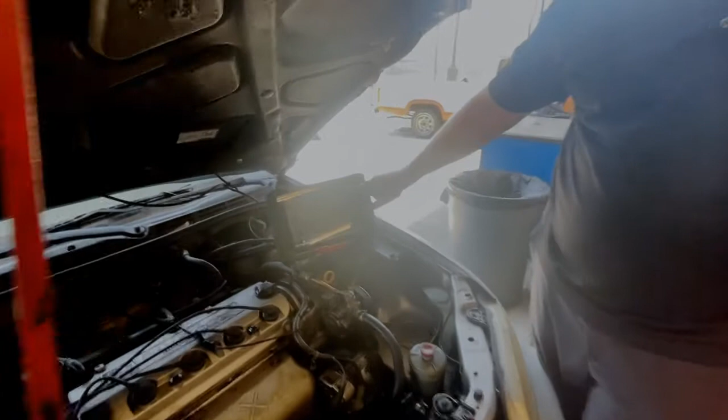What we're going to do is we're going to take away spark from each cylinder at a time, and we're going to look at the RPM drop on our graph here. So this is RPM, and we have in hundreds right here, and this is that live reading over here. So we're about 750, 740, bouncing right in between.

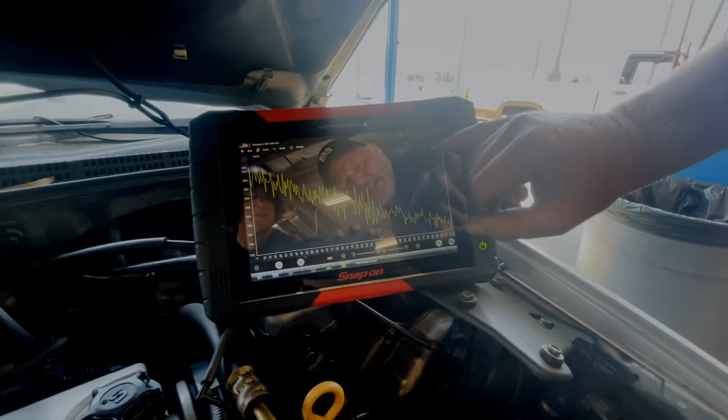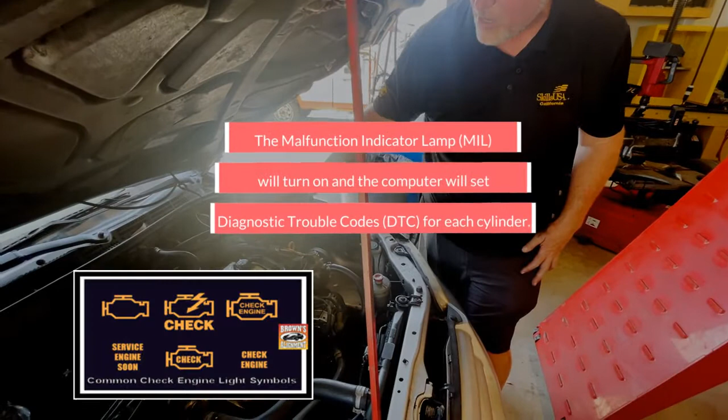So a cylinder balance test, you're checking the health of the cylinder by removing the spark. You could also do fuel injectors instead of the spark, but they're really hard to get at on this one. So we're going to just focus on the spark plug one at a time. This is cylinder 1, 2, 3, 4. Keep in mind this will set a code for each cylinder.

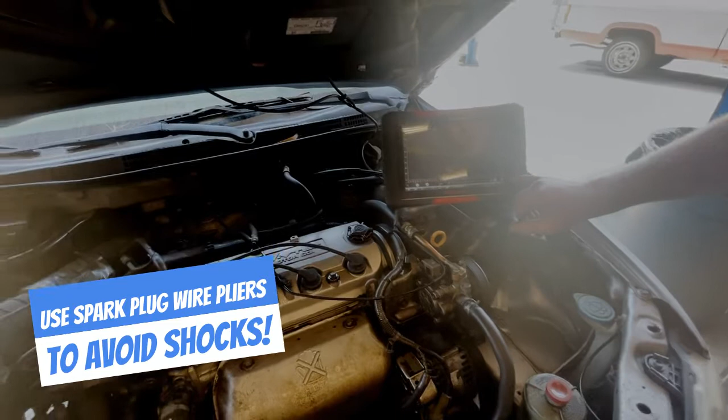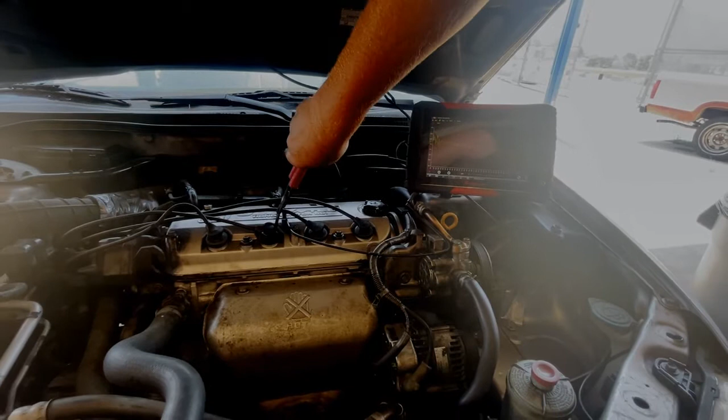So I'm going to go ahead and pull this, and I'm going to pay attention to our RPM drop. And put it back in. And it looks like it dropped to about 540. So now I'm going to go to the next one. Not quite as much drop. Go to the next one. That one seems a little healthier. That one's just as healthy.

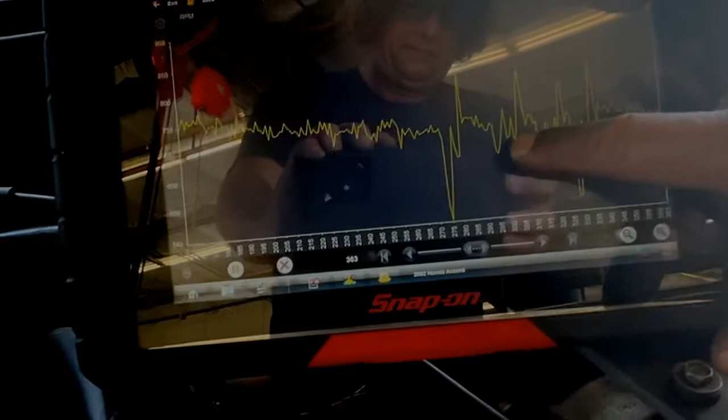So here's cylinder 1, cylinder 2, cylinder 3, cylinder 4. Cylinder 1 is my healthiest cylinder, which means I'm getting good air, fuel, spark, good compression. The number 2 cylinder is the one that I'd be thinking of as being my problem right here. So 2 is definitely the weakest. So let's go ahead now and rev the car, because when you do this test, you really should rev the car in between each RPM drop.

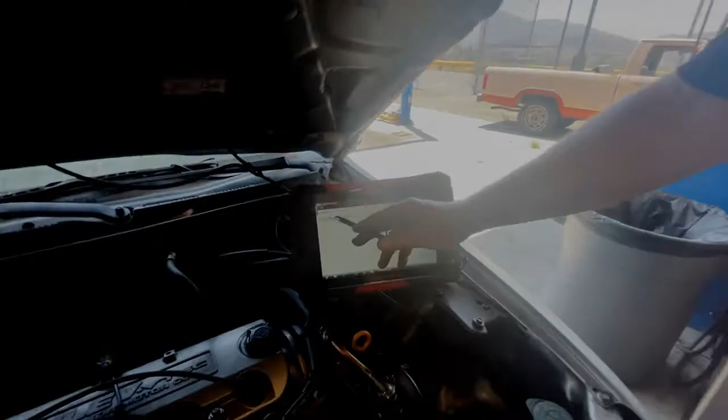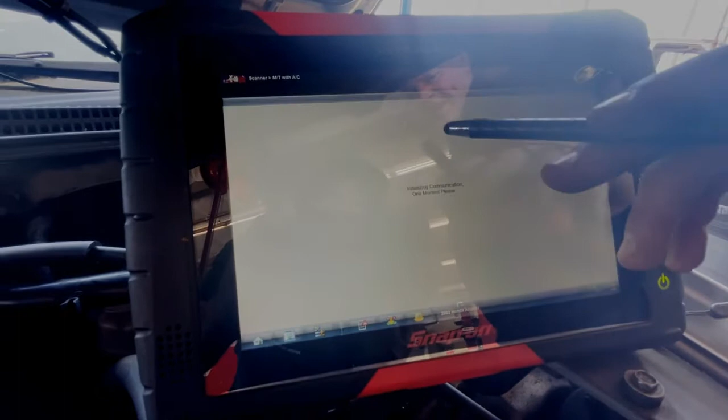But I want to show you how I got the RPMs. I'll hook up my scanner to the data link connector. And this is on the engines menu, okay? So there is a menu for engines and other computers. We want the engine, we want data. And then the very first data most cars will give you is RPM. And so here's RPM, it's always the number 1.

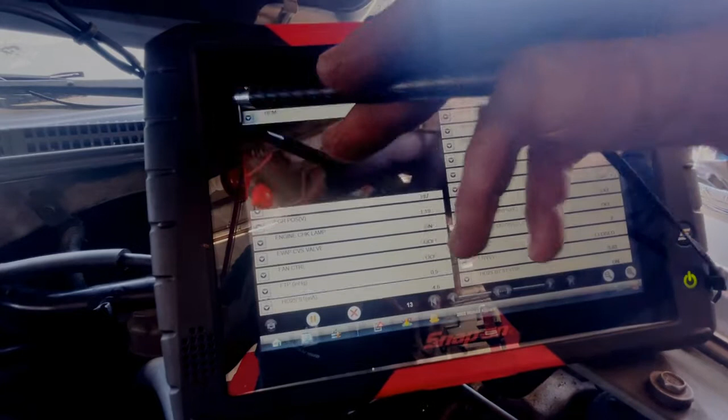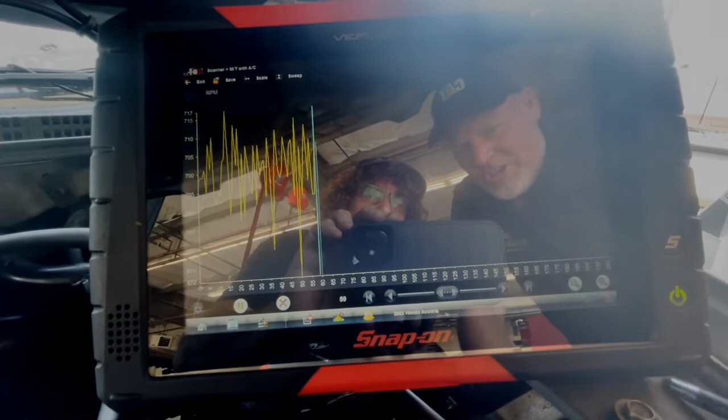And then I want to expand this. See the little arrow right here? There we go. Okay, so that's how we expand it. Hit that little arrow, and if I want to shrink it, go right here. So now let's go do our test real quick. We're going to do it real fast. We're idling right now about 700 RPM because our car is warmed up now.

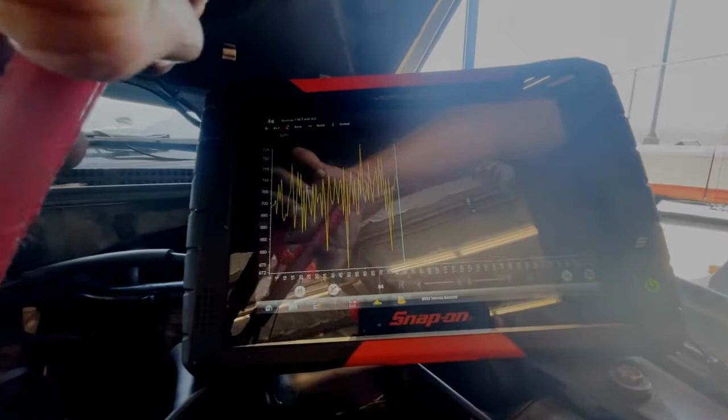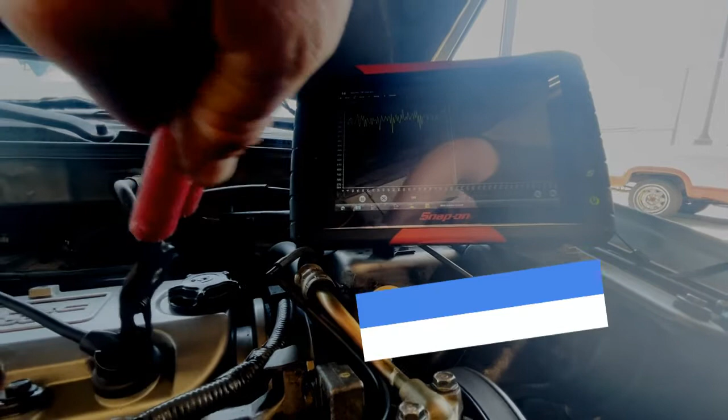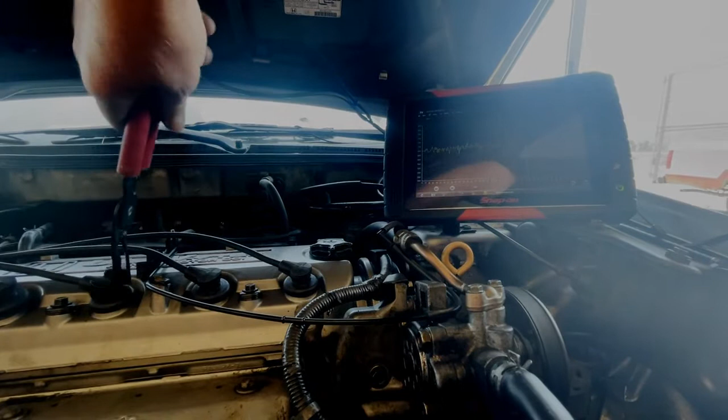So I'm going to go to cylinder number 1 right here. I'm going to back out a little bit so you can see both. And I'm going to do all 4 real fast. Here we go. There's 1 drop. Go to cylinder 2. There's number 2 drop. Go to number 3. There's number 3 drop. And then I'm going to go to 4. And number 4 drop. Okay? And now, before I lose my info, I'm going to go ahead and pause.

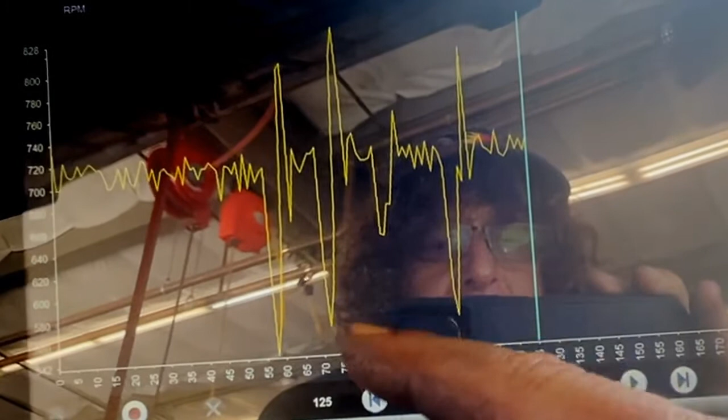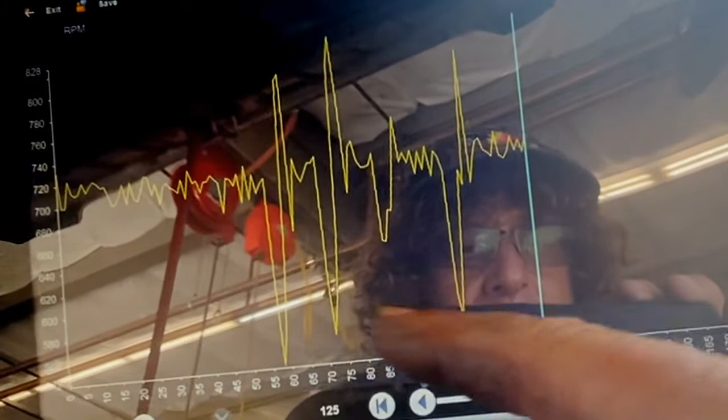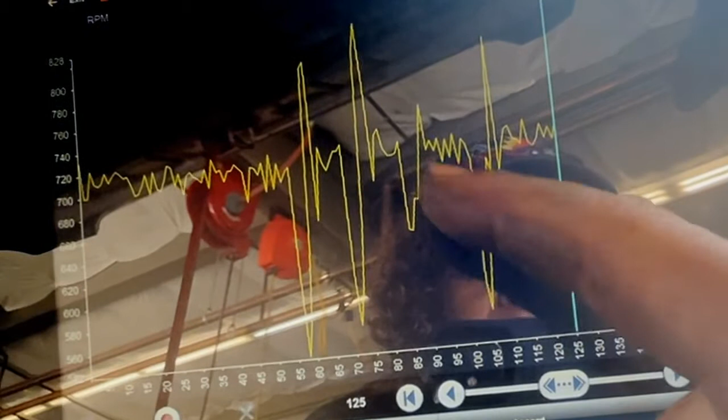And now let's go ahead and study this. Let's look at our readings here. So this is cylinder 1, 2, 3, 4. And what you're looking for when you take away either fuel or spark is an amount of RPM drop, and they should all be within 5 or 10% of each other. So these 3 are within range. They're not too big of a difference between number 1, 2, and 4. What I'm worried about is cylinder number 3.

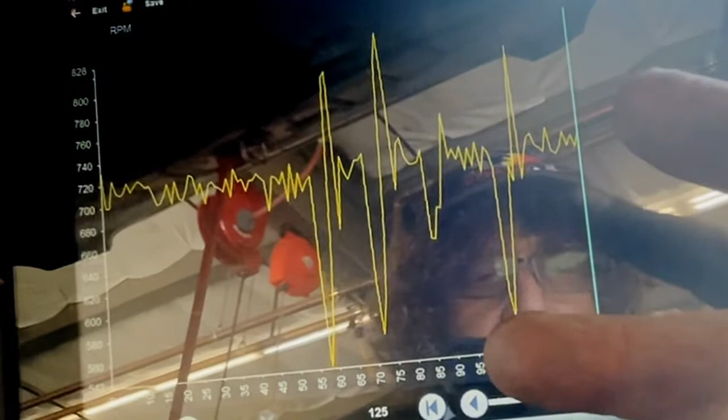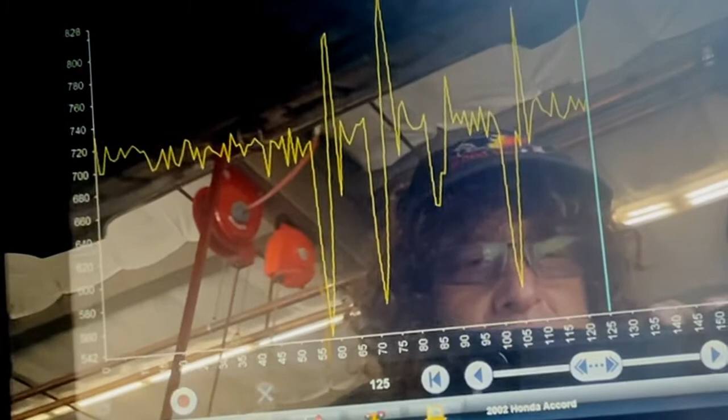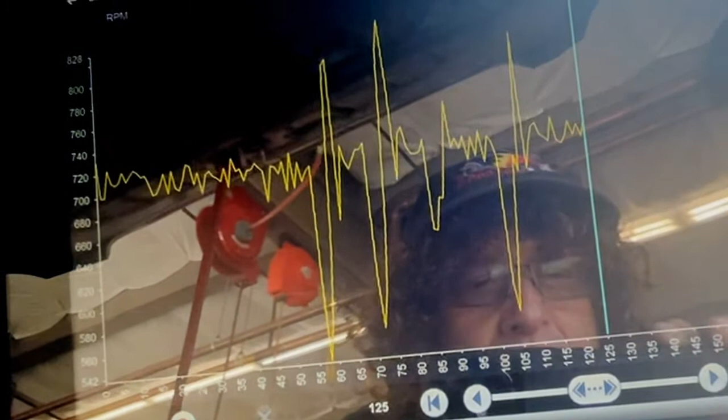So we got to figure out first, is it tune-up related, which is it air, fuel, or spark, okay? So it could be just a tune-up where I need to change my spark plugs, or it could be a bad injector. Maybe I have an intake valve that's not functioning properly, okay? If it's not tune-up related, where you can't adjust the valves, you can't change the injector, or you can't change the spark plug, then we mechanically test this whole motor, doing a compression test, identifying number 3 and if it's a compression issue.

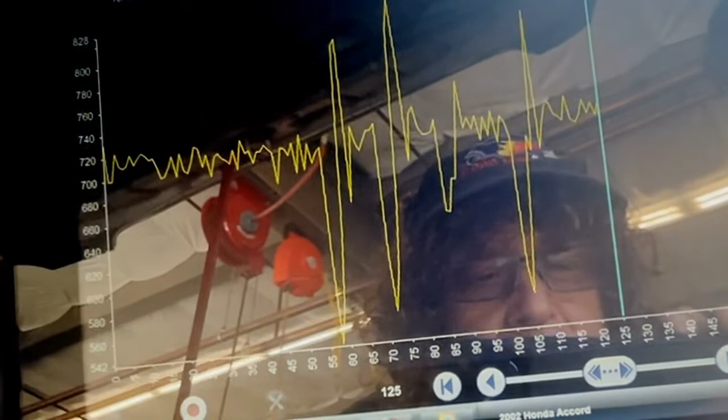So we don't really know what the issue is here. It could be tune-up, it could be compression. So first off, what we would do is go pull the plug and let's inspect it and see what the color looks like. All right.

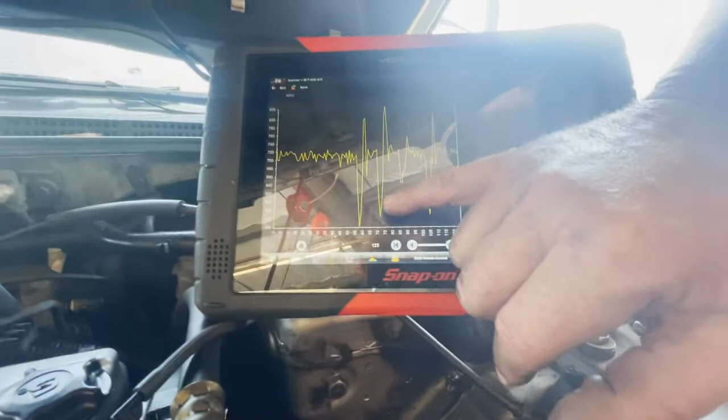Another thing I wanted to point out is number 2 cylinder right here. Here's my drop. If it was the same as number 3, I would be suspecting a blown head gasket between cylinder 2 and 3. So the gasket that seals each of these cylinders, we would have a blown gasket between cylinders 2 and 3 if these match.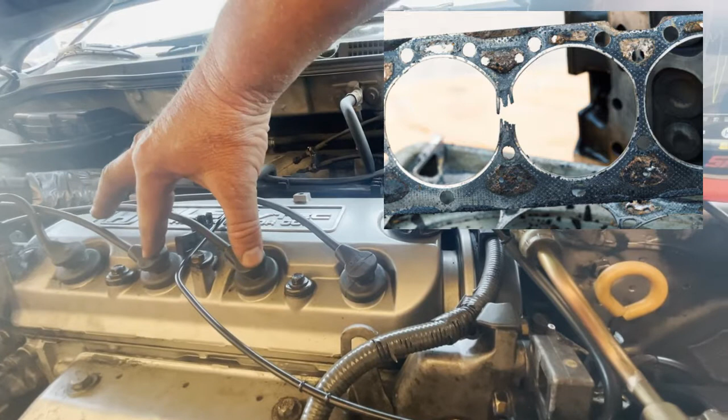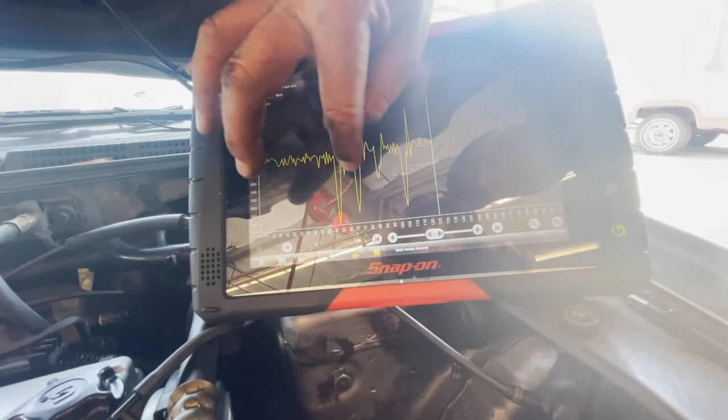So I am a little concerned because there is not quite as much of a drop here and here, but not too much. But if these were the same or these two were the same, head gasket. And then we would still need to do mechanical testing to verify that's true. All right, so let's go ahead and pull this plug out and let's see what the color is. I will say the plug was a little loose.

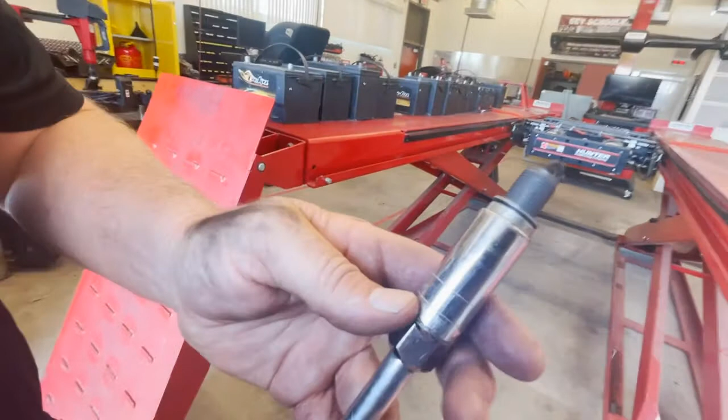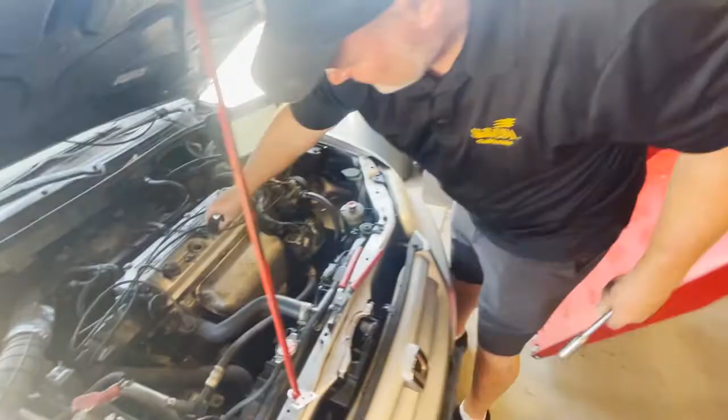Pull this plug out. It's definitely black. See that? Definitely black. It should be a whiter color or tanner color than this. So here's what our option is: we could go ahead and compare it to the next ones. Now let's check one of the healthy cylinders. Number 1 was the healthiest. So let's go ahead and check this and compare with a good cylinder.

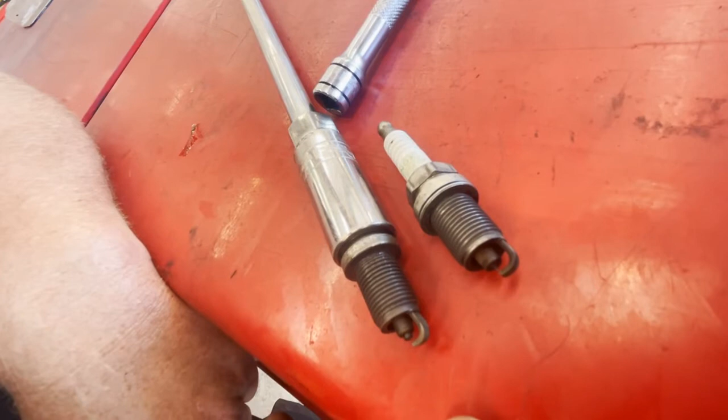Well, this is a platinum plug. This is a regular copper plug. It could be that my kids put in the wrong spark plug at the high school. That could be the issue there. That's what it looks like. Yeah.

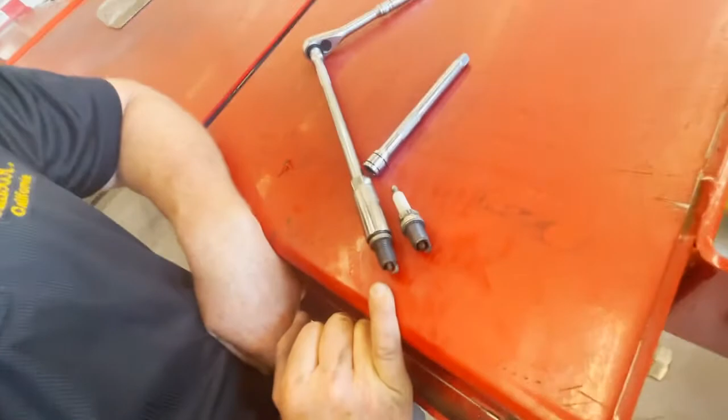So we probably should just go ahead and put a new set of plugs in this and see if it improves. We're in the summer and I can't go buy plugs right now because this high school is closed for the summer and I can't use the budget that I have. So what we're going to do to verify if it is the plug is we're going to switch the number 1 plug with the number 3 plug and see if that changes the way this car runs.

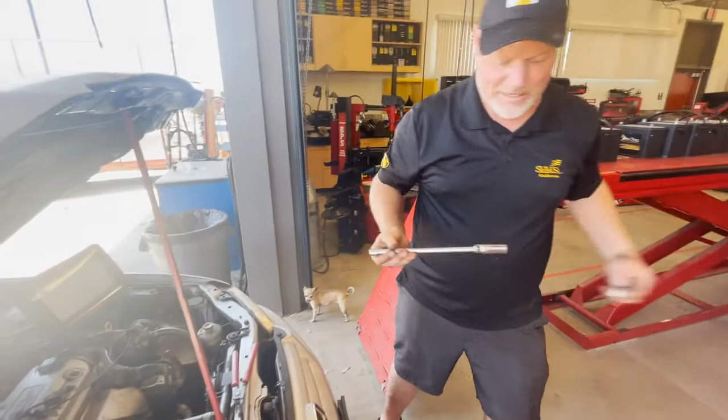Okay, so being that I'm in a high school, this is a pretty common theme that we come across. I have like 15 cars. The kids get the inventory mixed up, and we get a motor that will have different plugs in it. It's pretty common, and it's the summer that I try to correct those conditions. So let's just do an experiment here and see if that platinum plug is the issue.

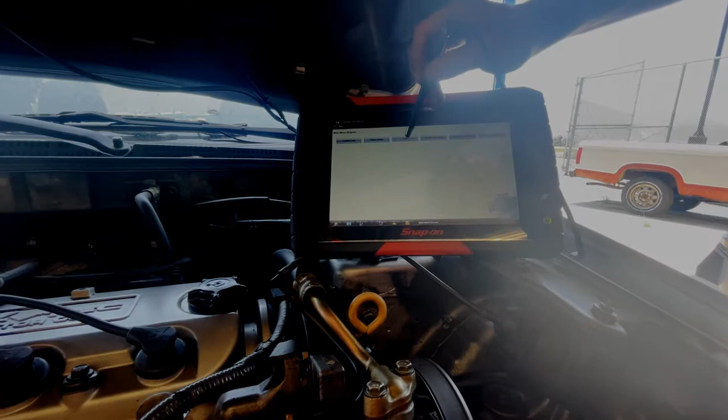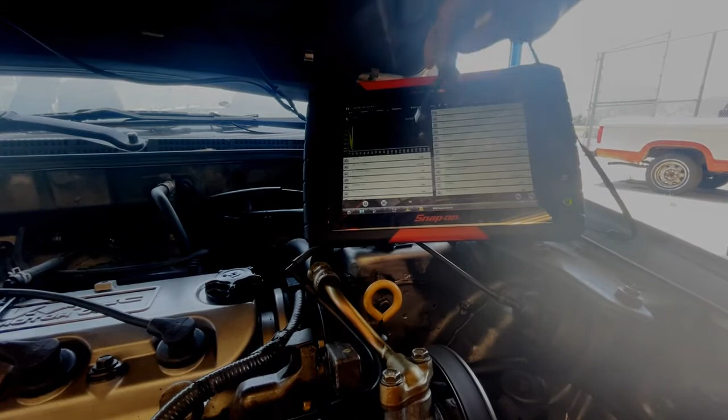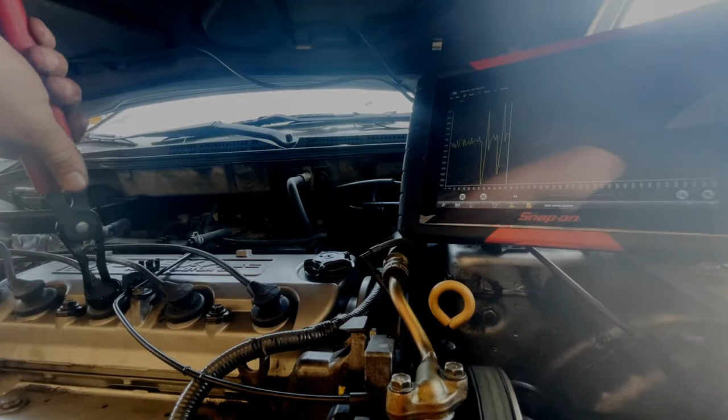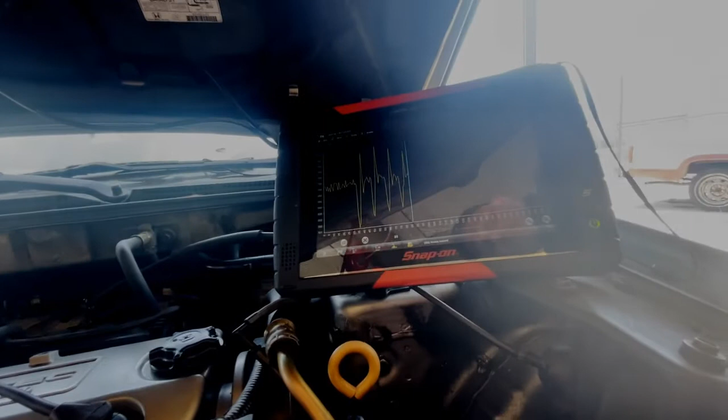All right, put that in, and then we're going to redo our cylinder balance test. Let's get started. So data. RPM, expanded. Okay, we're right at 700 RPM. Let's do cylinder number 1. Looks good. Cylinder number 2. Looks pretty good. Cylinder 3. Not quite as much in cylinder 4. Well, I like that reading a lot better. It did make a difference.

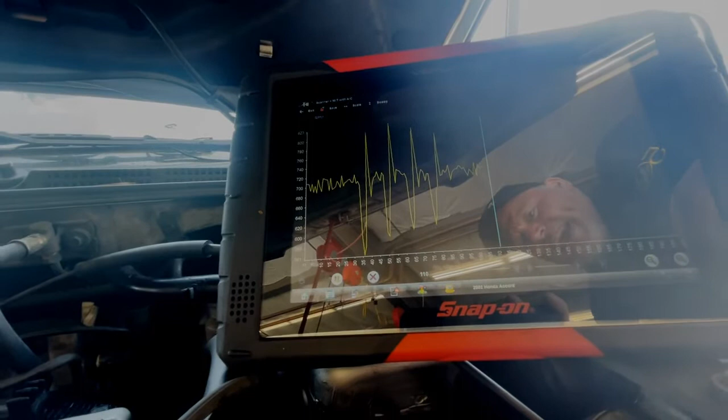But really, we need to change all these plugs. These plugs have been gapped and cleaned for an entire year, and they're worn out from just kids practicing on this car over and over and over. So we definitely need to change all the plugs, and by changing all the plugs, we'll probably get equal RPM drop. But the main thing about this video is how important the cylinder drop test is.

A cylinder drop or a cylinder balance test. Most people call it a cylinder balance test. You're looking to see the health of each cylinder and how it produces power. And what happens is you take away spark or fuel and you see that power loss in the RPM. And that's as simple as the test can be.

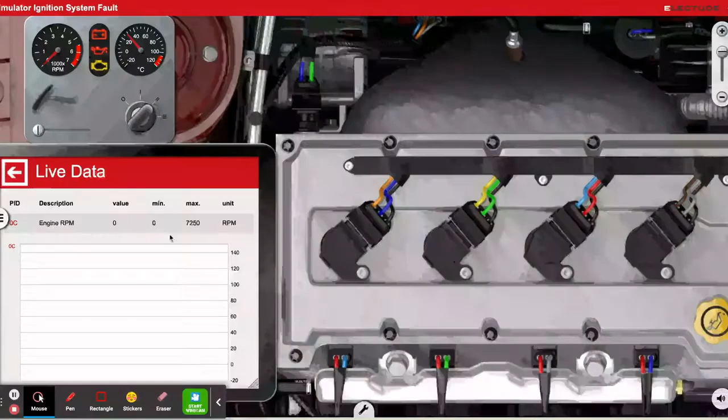This is our Electude simulator that we use to go over different parts of the car. We have a coil on plug engine here, meaning that if you remove the connector, these are the coils right here, and underneath the coils is a spark plug. Okay, we definitely have an ignition fault right now with the way we set this up. We have our instrument cluster, and over here we have our live data. We're going to really focus on the value here, not so much the graph, which they could do a better job improving. Here we go.

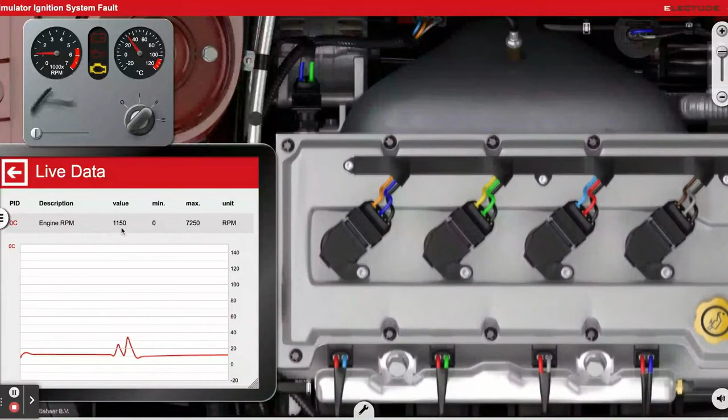So we're going to start it right now. And you'll notice it averages, let's give it a little gas first, let it kind of settle down. Okay, so we're averaging about 1,150 RPM. Let's start with cylinder number 1. Went down to 920, so a little over 200 RPM. Let it level out, and now we'll do number 2. Again, and we'll drop about 200 RPM. 3, about 200 RPM, and 4, nothing. So we definitely have a problem with cylinder number 4.

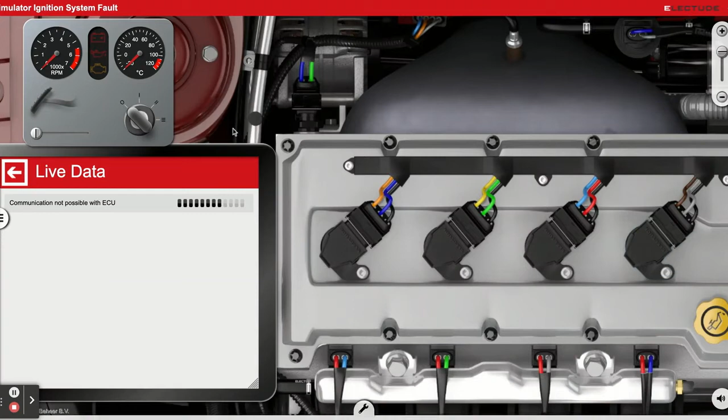Let's try our injectors. That's a good one. That's a good one. That's a good one. So we definitely have a problem with cylinder number 4. I'm going to go ahead and take this and replace this coil. Put a new coil back in it, plug it in, and let's start it and see how we do. Sounds better. Let's give it a little gas. Oh, our misfire is resolved.

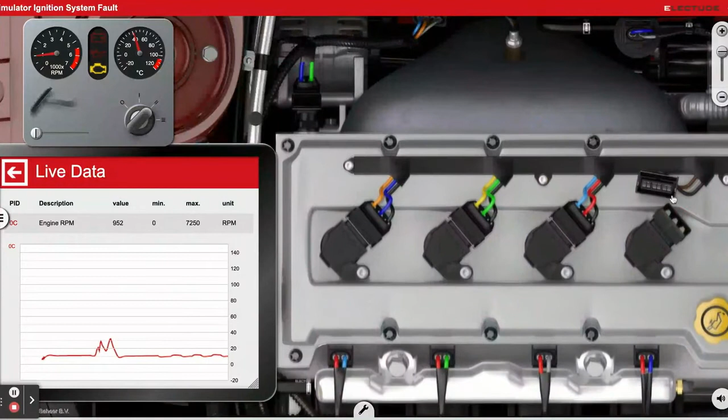Okay, let's do our cylinder balance test. 1, 2, 3, 4. We got it cured, and we also got it fixed with removing the fuel with the fuel injector. So we're good. Last thing we got to do is clear the codes. So we're going to go back to clear the codes, fault codes.

And I want to emphasize that whenever you unplug an injector, you're going to get a 200 code. So you notice a 201, 202, 203, 204. And then whenever you unplug a coil, you'll sometimes get a misfire code, or you'll get an ignition coil primary circuit code. But they're the 300s, so 301 to 304 and 351 to 354. So let's go ahead and clear these. Let's check to see if there's any more codes, and there's not. And our check engine light is off. A cylinder balance test is that simple.